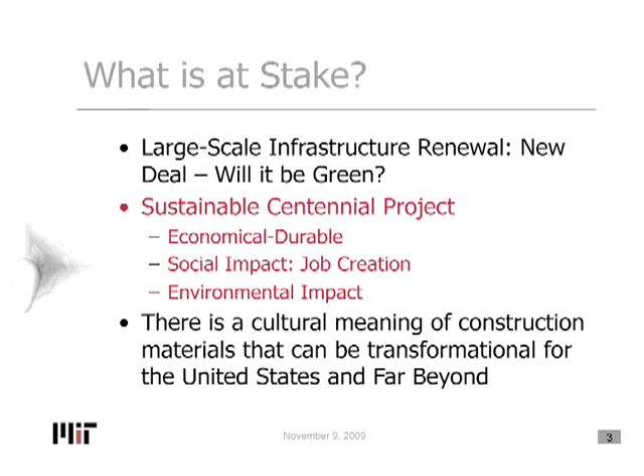Sustainable development has three components we should never lose sight of. It includes economic growth, social progress and impact, job creation—very important these days—while reducing the environmental impact. Doing something here for materials and structures has an impact with cultural meaning, social meaning, environmental meaning, and which can be transformational far beyond the immediate use of a project.

Now let's put that in context about concrete consumption on this world. This data shows worldwide consumption of materials, and you readily recognize that concrete, after water, is the material most consumed on Earth. Every person consumes roughly 1 cubic meter of concrete every year.

I don't know where you stand on November 9th, 2009 with your yearly concrete consumption—you still have a few weeks to finish your cubic meter. But that's actually the impact of whatever we do to the material: concrete, 25 billion tons produced. We could think about replacing it with wood, but already we've bypassed largely the worldwide ecological capacity of Earth.

Now, this immense consumption of concrete comes at a non-negligible environmental price. That price results from the production of cement, which requires energy but also releases CO2. In fact, each ton of cement produced roughly releases 1 ton of CO2 into the atmosphere.

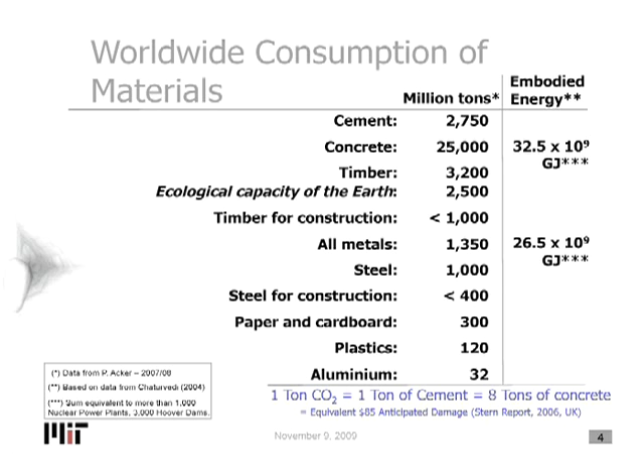Just to give you a number, 1 ton of CO2 is the absorption of a tree over 100 years of lifetime. So roughly a column in this building, 3 meters high, made out of concrete, is roughly 1 ton of cement. If I made a rough calculation for this whole building's concrete, I came to something like 1,000 trees absorbing CO2 for 100 years—that's about the CO2 impact just from construction of this building.

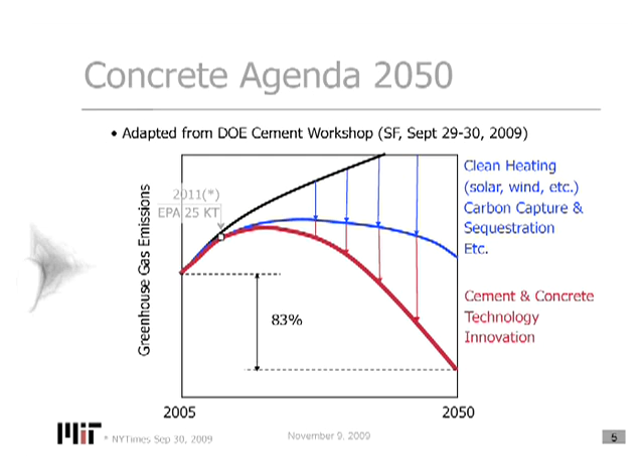Now, what are we looking at in terms of Concrete Agenda 2050? If we were just to go over to clean heating, we would not be able to meet a reduction of CO2. In fact, the Department of Energy, fostered by a bill which went through the House of Congress in the United States, foresees by 2050 a reduction of 83%

of greenhouse gas emissions related to cement and concrete production. There's no way to achieve that without new technology and innovation.

So let's put this in the context of concrete innovation. When you think about concrete, it has been used since Roman times, in essence. However, until the mid-80s, essentially nothing happened. What happened was that the material, which is highly heterogeneous at multiple scales, became an industrial product.

In the mid-80s, through breakthroughs in science discovering the sub-millimeter scale, people developed what they call high-performance concretes, which have a much higher strength, and I'll say a little more about this later.

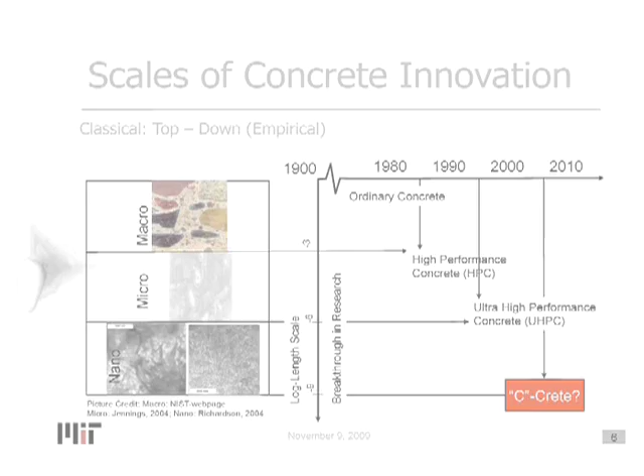In the mid-90s, people discovered the sub-micrometer scale, discovering that the material is still heterogeneous but formed out of calcium silicate hydrates in two fundamental forms, which gave rise to ultra-high performance materials that today have a

strength like mild steel. Right now we are discovering the atomic scale or electron scale, and I don't know what comes out of it, so let's call it C-Crete for a moment.

Now, what is the whole aim of bringing material into a green phase, a material like concrete, which clearly is not green? Well, the problem actually can be solved by increasing the strength of the material.

And the problem is as old as Galileo Galilei, who once explained why there are no monsters on Earth. The weight of a monster increases with its volume, while the strength of body parts—bones, flesh, etc.—increases with the section. So as the volume increases in weight, the section will not increase in the same way. That's why there are no monsters on Earth.

You want to try this as an explanation for your kids when they're 5, 6 years old. It works. I tried it with my daughter.

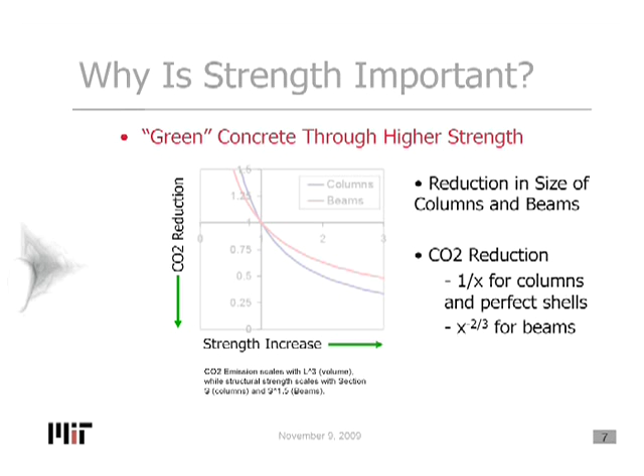But we can now turn this around and say the CO2 impact is actually driven by volume. So if we increase the strength of the materials, we basically decrease the environmental impact by 1 over this strength increase. So if we increase the strength by 50%, by 100%—double the strength—we have only half of the impact.

So how can we achieve this? Well, we can't achieve that in the classical way as engineers used to work, in a top-down fashion—identifying a problem at a certain scale, solving it, going upwards. But actually what we have to do is go down to fundamental scales. And it's maybe surprising that until recently, the molecular structure of the fundamental building block of concrete was not known.

Well, recently we've been looking at that—a group of physicists, particularly people from statistical physics, along with material scientists and engineers—and actually found that concrete at this fundamental atomic scale has much more in common with a glass than with what you would expect concrete to look like, gray. It's a glass just delimited in its structure by water molecules which are in the interparticle space.

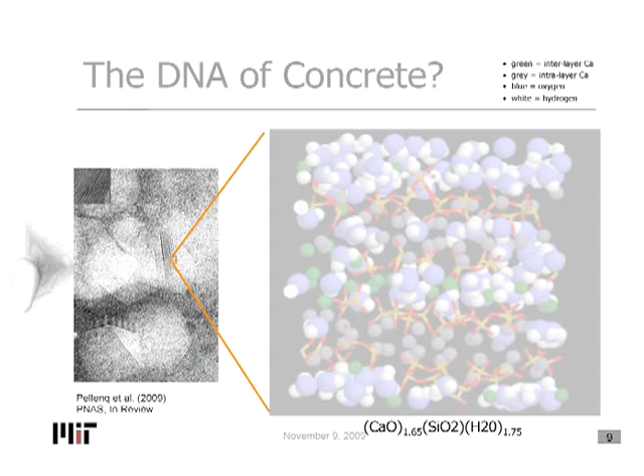Now, why is it so important to look at that scale? Well, if you're able to change this molecular structure just a bit and increase the strength, you can propagate this all the way up to reduce the environmental footprint.

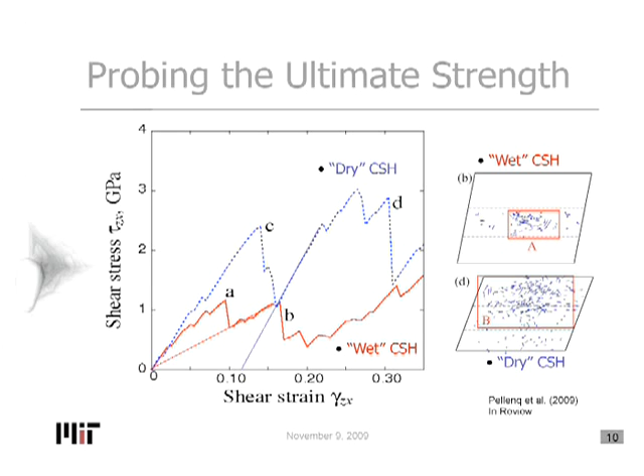Just to give you an example, here's an atomic structure. You can tilt it, you can squeeze it, you can stretch it. This is a result of such simulations, which basically shows that if concrete were dry, we could immediately increase the strength by a factor of 2, reducing the environmental footprint of this most consumed material on Earth by 50%.

But that's just the atomic scale. So how do you bring this upwards to larger scales?

The way we do this is we take needles at nanometer scales and test the materials. What we're able to do then is test some of those elementary building blocks and basically identify how they look.

Well, that is not an Egyptian pyramid—this is the remaining footprint left after such a test.

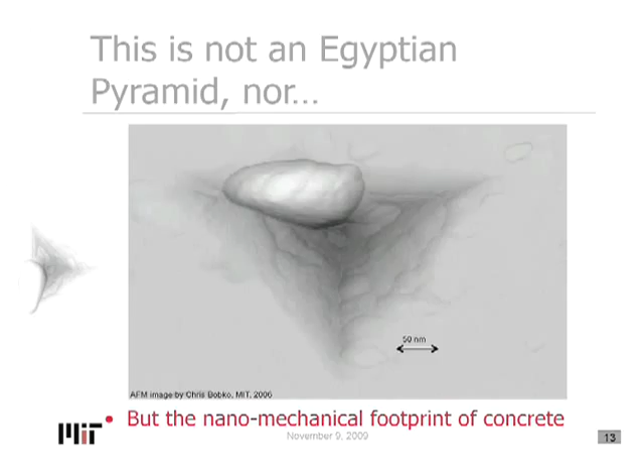Now, what we're able to access in those materials is basically probability density plots of packing densities—how you can pack granular materials. Interestingly enough, for the material most used on Earth, ordinary concrete achieves a packing density of 64% as a dominating phase. That's oranges randomly packed, a bit like these oranges here in this pot.

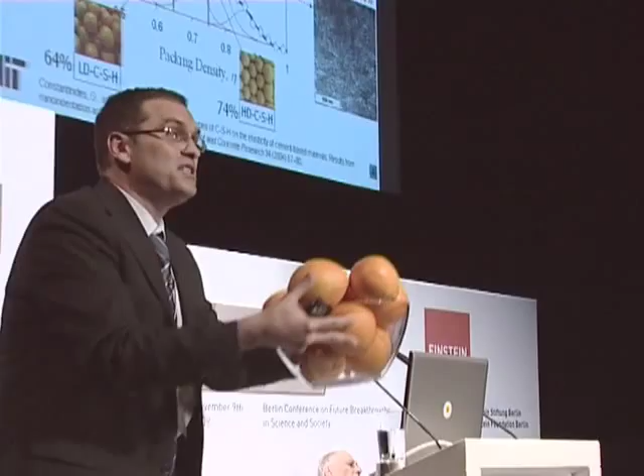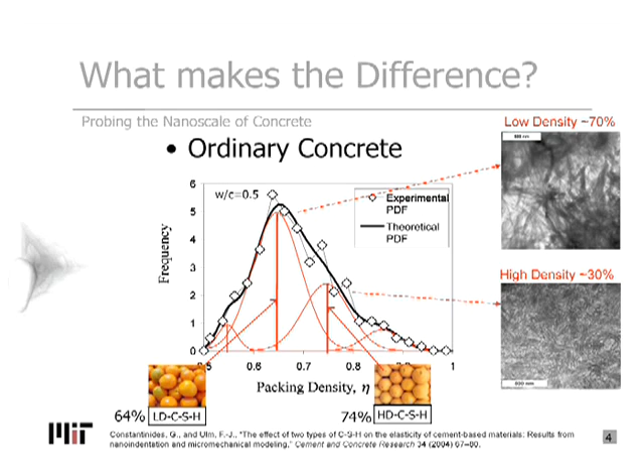But the second phase which comes into picture here is one at 74%—the limit packing density of a spherical object in an ordered way. This is like if you take 4 oranges, put one in the middle, and now you get 74% packing. Well, these are 5 nanometer sized nanoparticles—there's no worker who puts 5 nanometer sized particles in there. Fascinating enough, this material is able to generate this type of behavior.

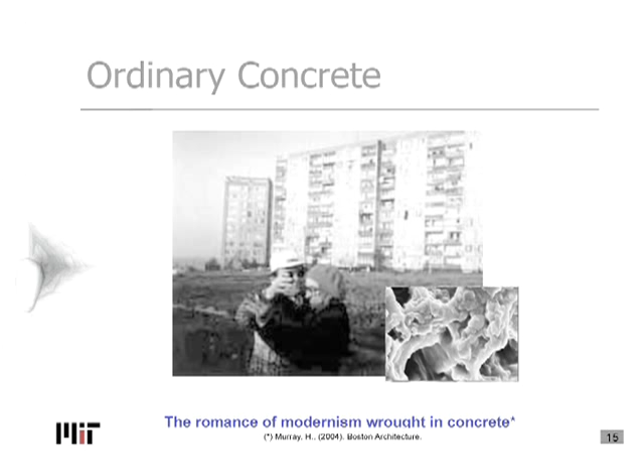Well, if we look at what ordinary concrete can do—we all know the bad concrete constructions, and we also know that ordinary concrete has been, and currently still is, used as a means of oppression, like the wall—and here's another wall which remains to be seen fallen.

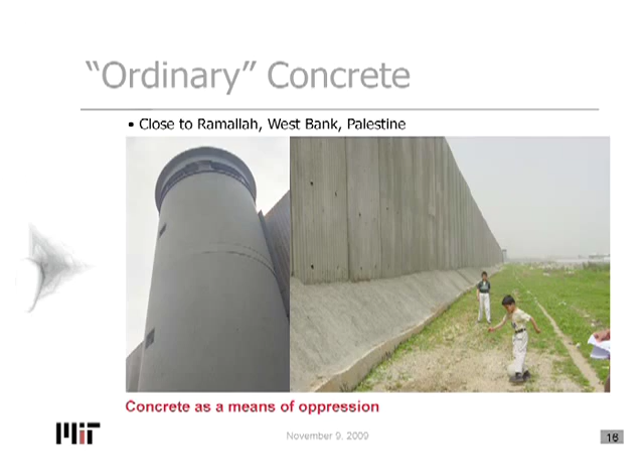If you now look at ultra-high performance concrete materials which came out of the end of the 20th century, right after the fall of the wall, you see what you're able to generate. You still have 74% packing density of those oranges, but now you get another phase which fills in the space in between, achieving 87%. So you can achieve higher packing in these bizarre materials, and that's the type of structure you can create with it.

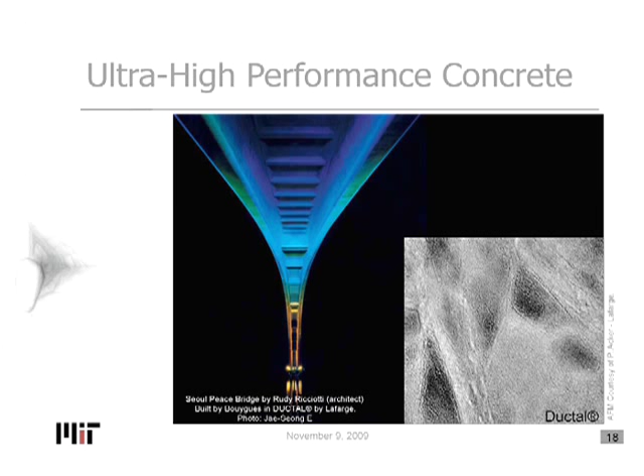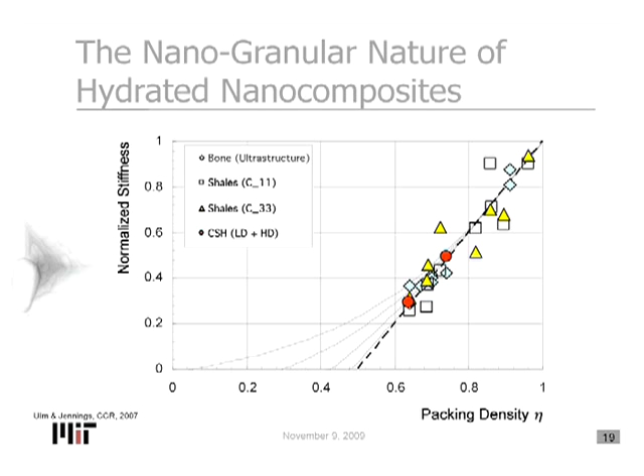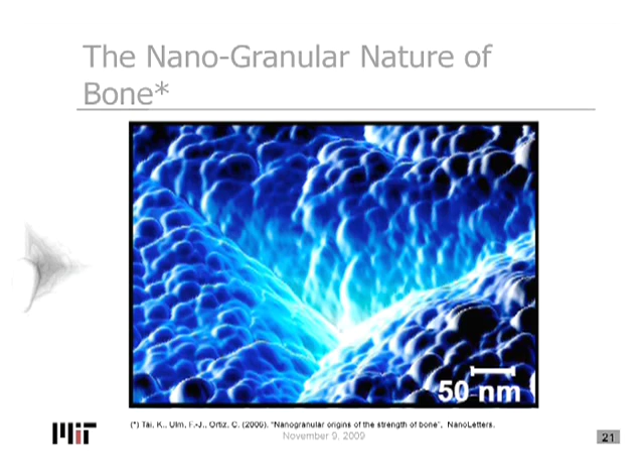This behavior of oranges isn't related only to concrete, but is in fact a stiffness behavior, a packing density pattern. Concrete is 64%, 74%. In between are bones—human bones. The idea that nature makes everything good is of course not true; it's just enough that we survive. Up here are ear bones, and other materials like shales. It's a general pattern of these hydrated nanocomposites. Here's an example of compacted clays from 3 kilometers depth, an important problem for natural gas formation in the US and Europe, and here's an example of bone, the nanogranular nature of bone.

So now you know what concrete and oranges have in common.

Since I still have roughly 3 minutes, let me take it one step forward, from that scale up to the structures, because sustainable development has to do with employment creation, with elevating stature. If you've ever worked on a concrete job site, you know concrete workers typically are at the end of the food chain. So what can materials actually do to elevate their status?

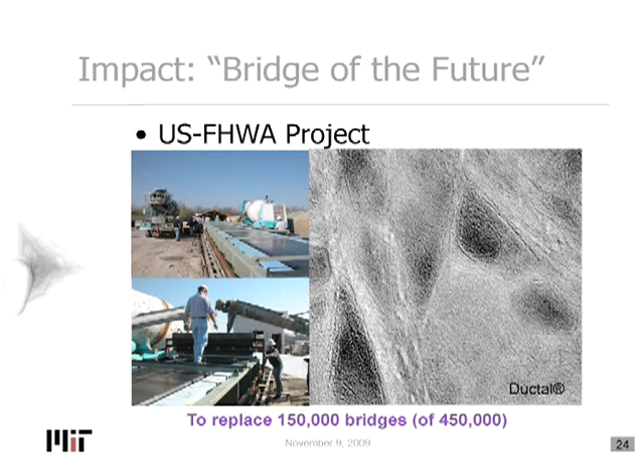I got involved in a project for the Federal Highway Administration to design a bridge for the future—a bridge using the newest material possible, but still feasible, to replace 150,000 of the 450,000 bridges in the US highway system. The bridge I came up with is a classical bridge design, except for its dimension: the deck is about 7.5 centimeters thick.

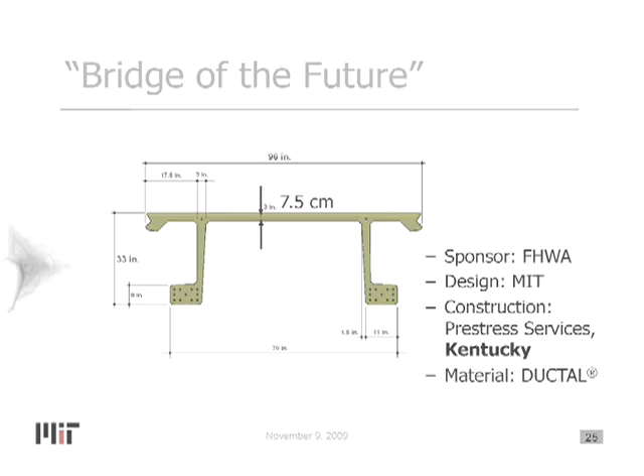And on that bridge you'll have heavy American trucks running. They actually called me to Washington when they built it and asked me to stand below it as they drove the truck over. That's evolutionary engineering, if you want.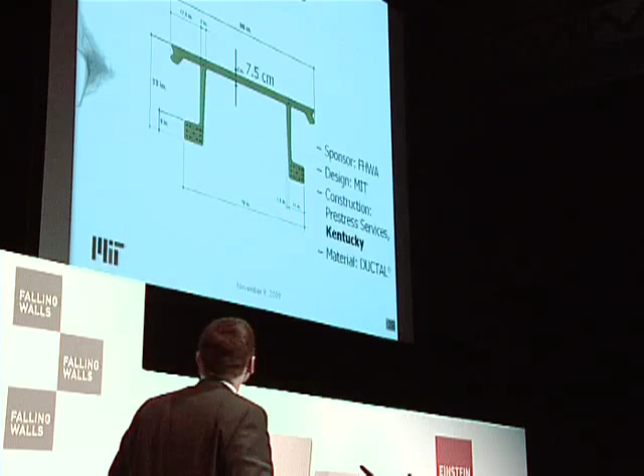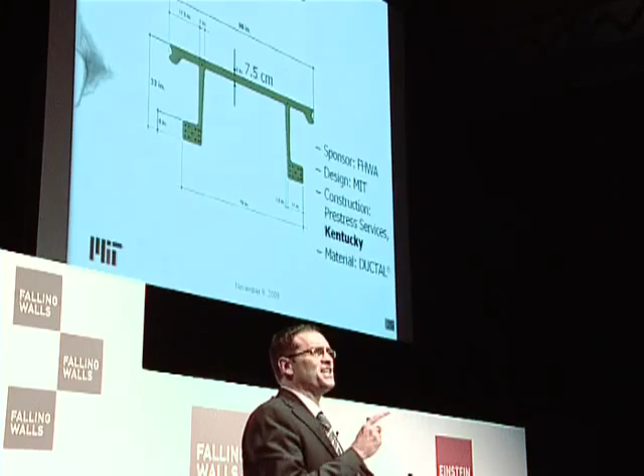But more important, I went to the site where it was built—in Kentucky. The Federal Highway Administration asked me to collaborate with Kentucky. For German speakers, I come from Bavaria, so I can say this: Kentucky is a little bit like the Oberpfalz. If you're able to build it in Kentucky, you can build it everywhere—in a positive sense, since I come from there.

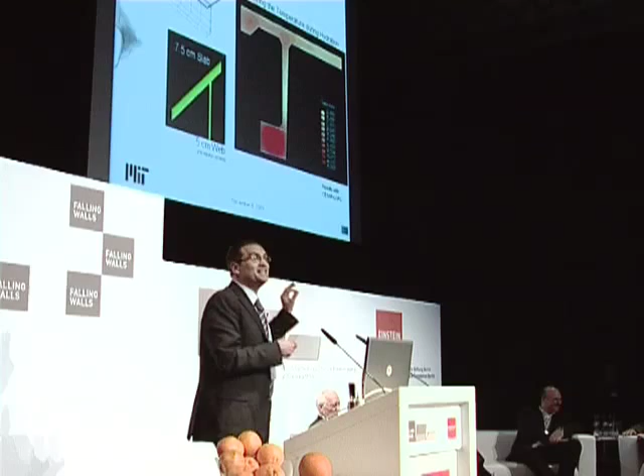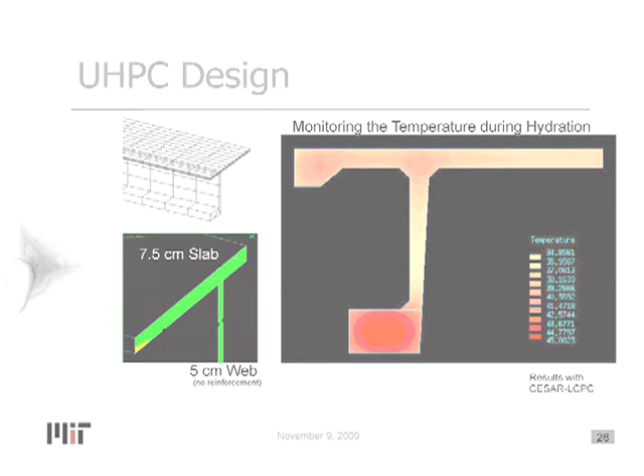What you actually do there is monitor the temperatures very carefully. Hydration is an exothermal reaction—an old story, you all know that. But there's something more to it: how can you tweak the material on-site to obtain this high packing density? The story is easy—this figure shows the temperature evolution inside the structure, inside this bridge, over time.

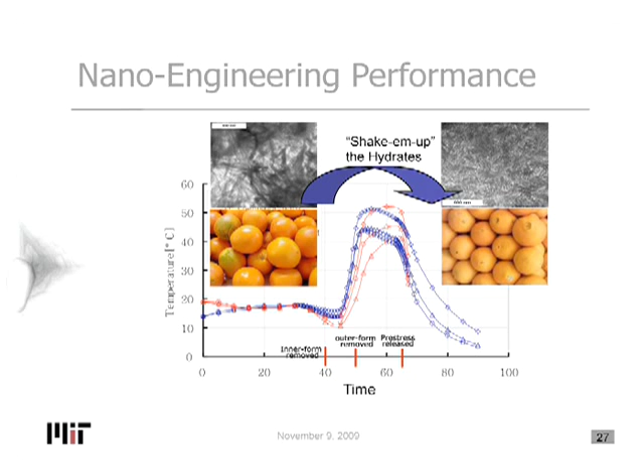Interestingly, what happens is you start out with oranges in disordered organization. You apply heat, from its exothermic sources, and the structure falls into place as this high-strength structure. Importantly, when I came to this job site and worked there with Hispanic workers in Kentucky, believe me, everybody felt part of something more important than the work itself. That shows how materials with environmental impact can also have enormous social impact.

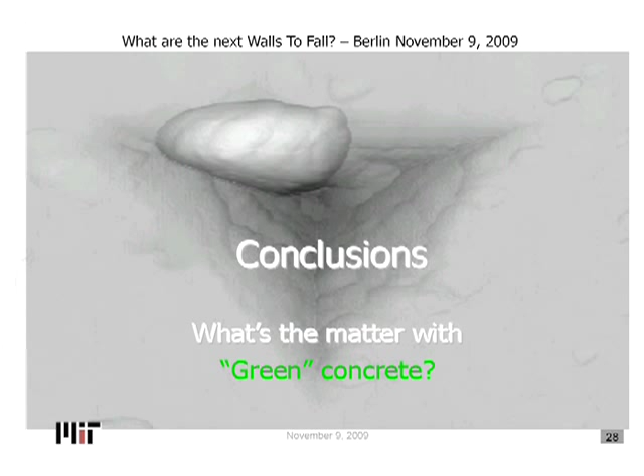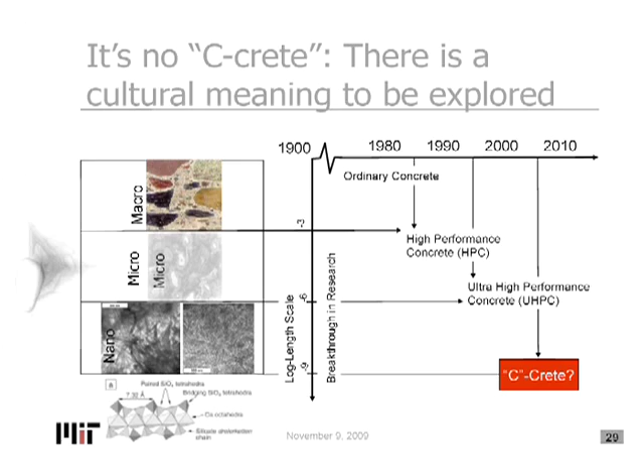To conclude, what's the matter with green concrete? Well, concrete is not green, we all know that, it's no secret. There's a cultural meaning to it—the fusion of physics and engineering to solve the next problem of environmental footprint. But solving the environmental footprint with a 20th-century view, just getting it out, just the same idea of solving the problem, without putting it in the larger cultural context—I'm afraid we will not be sustainable for the future.

This is just a reminder that there are not only oranges in this world, but also other fruits. Thank you very much.